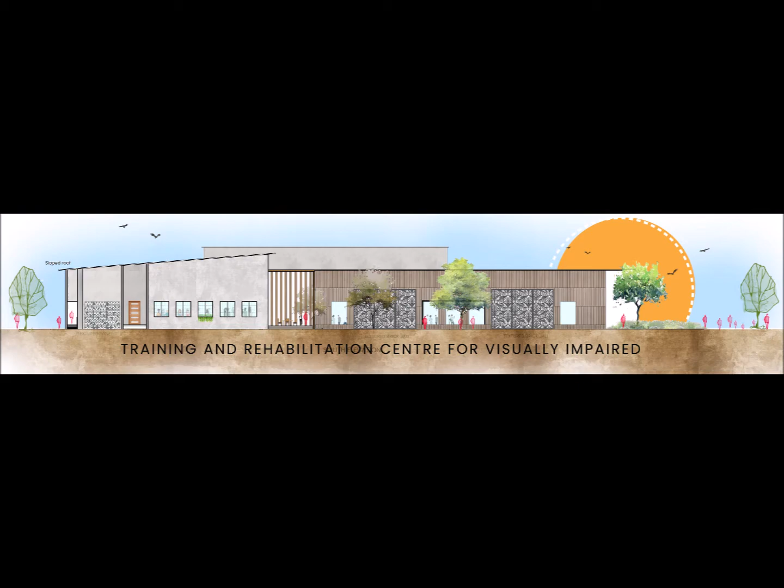I, Jasmin Anna Maxwell, will be presenting my B.Arch thesis, a training and rehabilitation center for the visually impaired. Visual impairment is defined as a loss or lack of ability to execute tasks requiring adequate visual acuity. Rehabilitation is defined as the process aimed at enabling persons with visual impairment to reach and maintain their optimal physical, sensory, intellectual, psychological, and functional social levels, so that they could change their lives to a higher degree of empowerment and independence.

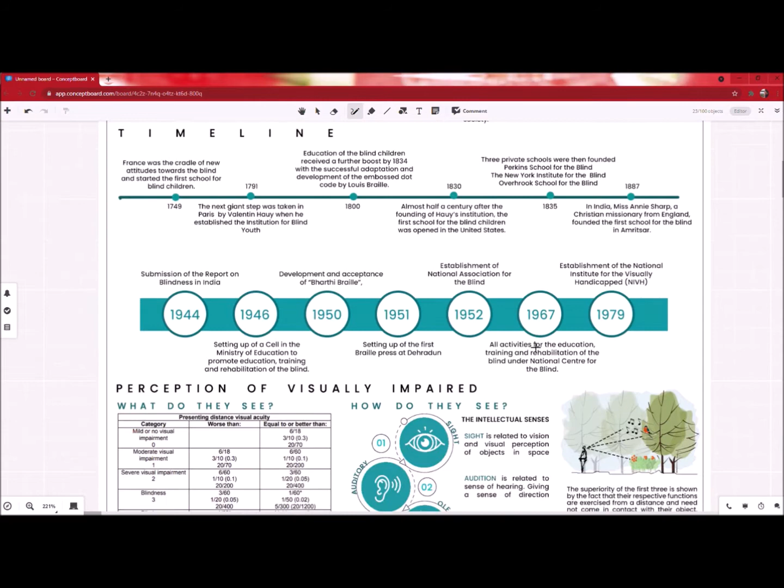Looking into the global scenario, there are over 2 billion people with visual impairments, 10 million of them in India. In the state of Kerala, there are 3,34,662 people with visual impairments, out of which 45% of them are not educated and around 13% in the ages of 10 to 30. In spite of this, there are less than 15 institutes established for the blind community all over India. There are schools that have taken up visually impaired students, but the courses are not catered to the needs of the blind user groups.

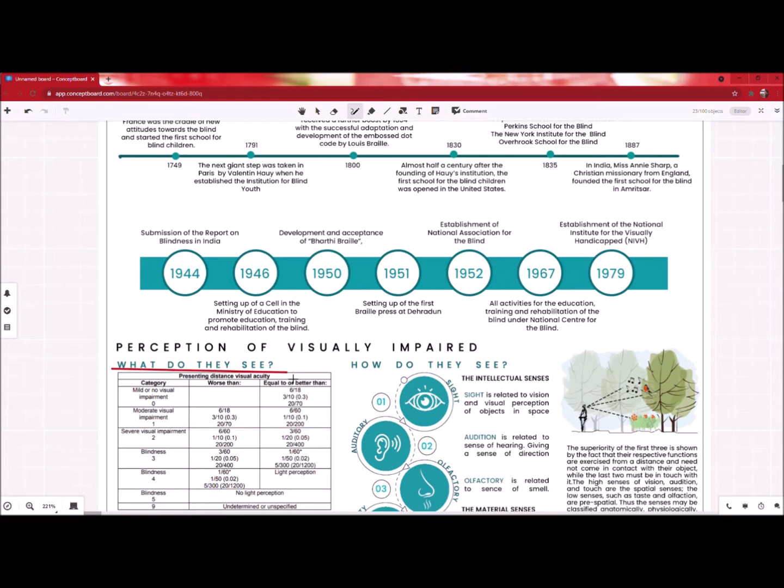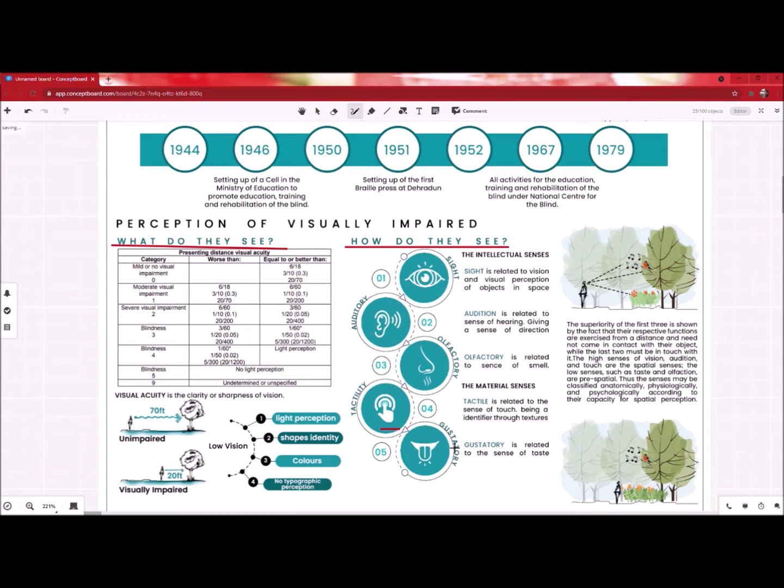To further understand the user groups, you have to know what and how they perceive these spaces. Therefore, various categories of visual impairment, low vision, and visual acuity were studied. The surroundings are experienced and perceived through sensory acquisition, mainly through the sense of touch or tactility, along with olfactory, auditory, and sometimes gustatory senses.

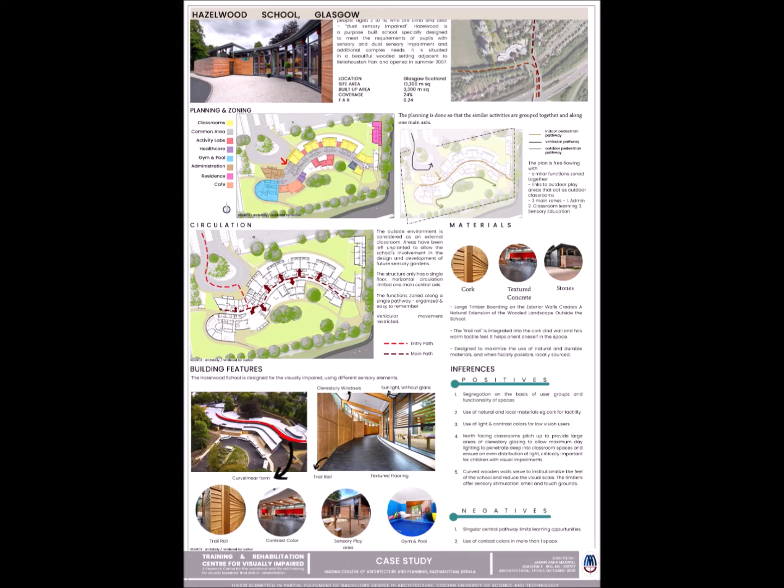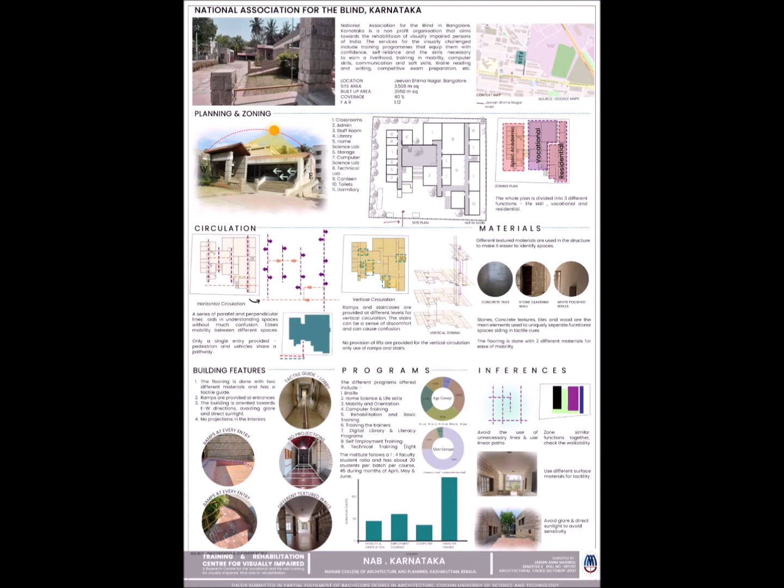To understand how these different sensory perceptions can be acquired through design, 6 case studies were conducted, 5 literature and 1 live. Them being: the Hazelwood School in Glasgow, Center for Visually Impaired and Blind in Mexico, Blind Relief Association, Delhi, National Association for the Blind in Delhi, National Association for the Blind in Karnataka, which was a live case study, and finally, Vocational Training Center in Calicut. After studying these, 7 parameters based on design strategies, user groups, and building elements are extracted.

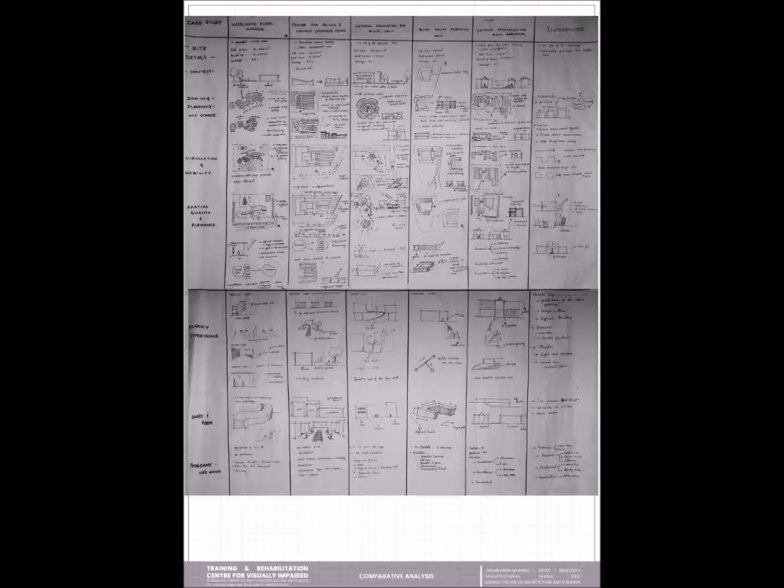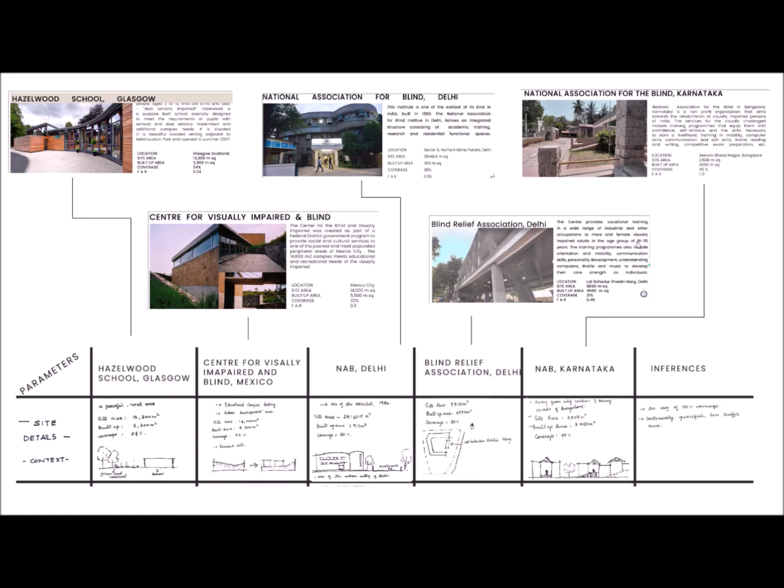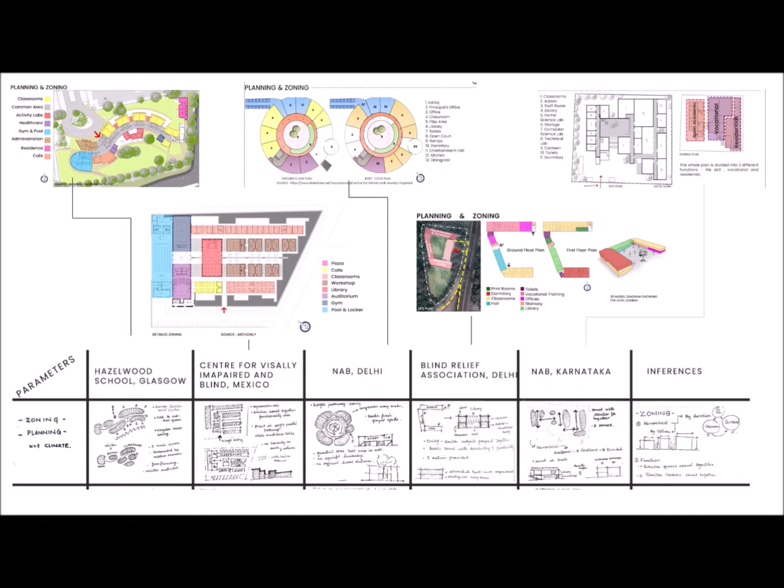First, the site details and context. All the case studies compared, the inferences and the standards lean towards 30% of built-up area in a more quiet, calm environment, which is easily accessible and has less traffic for the road training purposes. Next is the zoning and planning. The zoning strategy used in the Hazelwood School, Glasgow, and Center for the Blind, Mexico, proves to be the most accurate, where similar functions are zoned together. Volumetric hierarchy is given to different zones and activities. Similar courses are zoned together, thus forming different zones according to activities, both horizontally and in other buildings vertically.

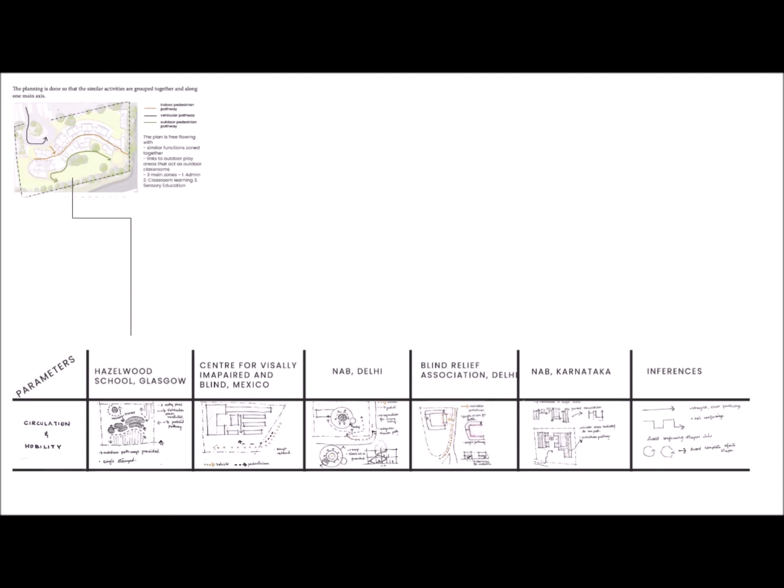The next is circulation and mobility. Circulation is one of the most important factors when it comes to design. The circulation should be linear, memorable with suitable cues. Symmetry and closed shapes such as circles seen in NAB Delhi should be avoided so as to not create confusions. Ramps are preferred over staircases, and single-story structures are preferred over multi-storied ones. There should be a clear limitation to vehicular access within the campus, and the campus design should be pedestrian-oriented.

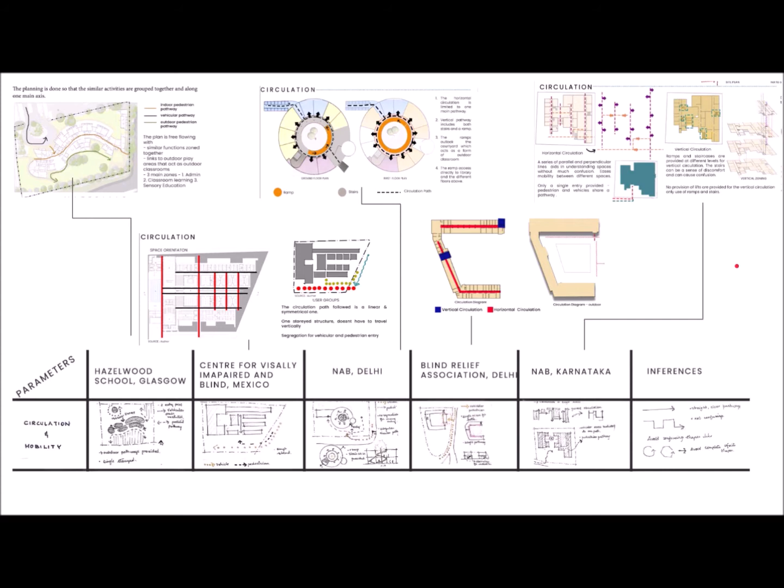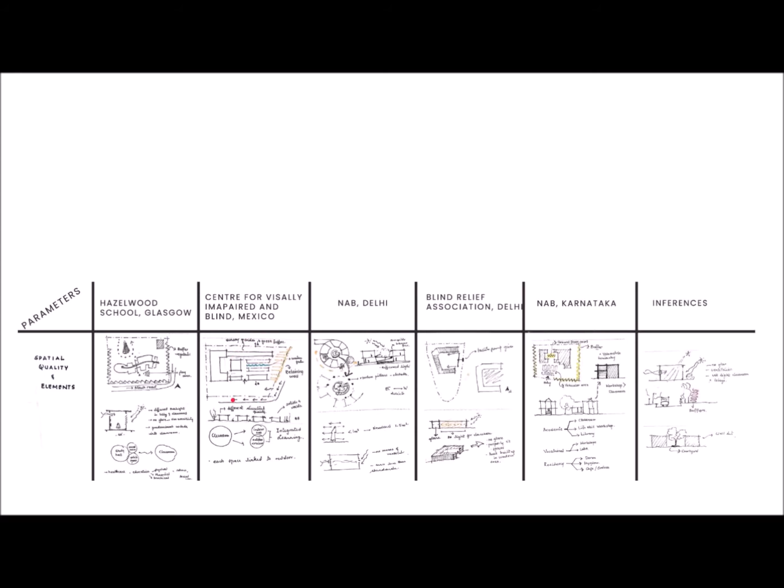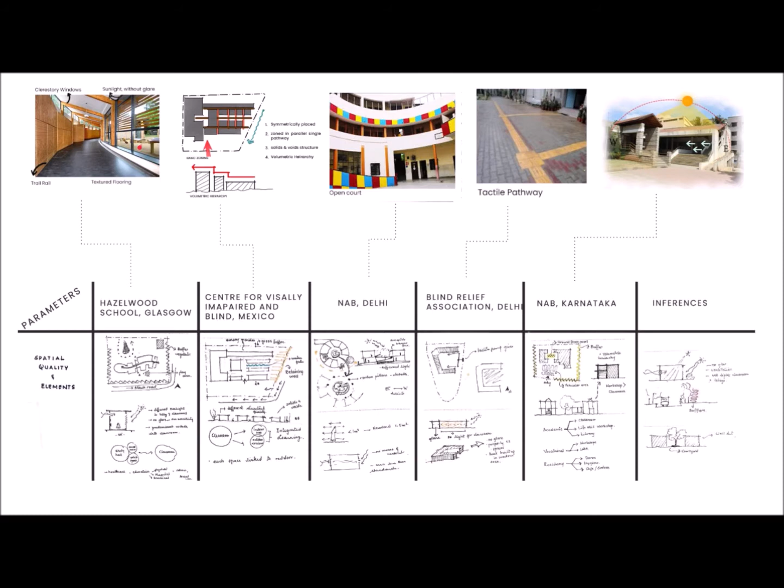Next is the spatial qualities and elements. As seen in the Hazelwood School and Center for the Blind Mexico, classrooms are well lit, fenestrations are positioned in a way so as to avoid glare, and clerestory windows and courtyards are used for ventilation and cooling purposes. Lobby and pathways are cleared from any projections and obstacles so as to create a hassle-free path. Indoor spaces are linked with significant outdoor spaces, and buffers are produced to reduce distractions.

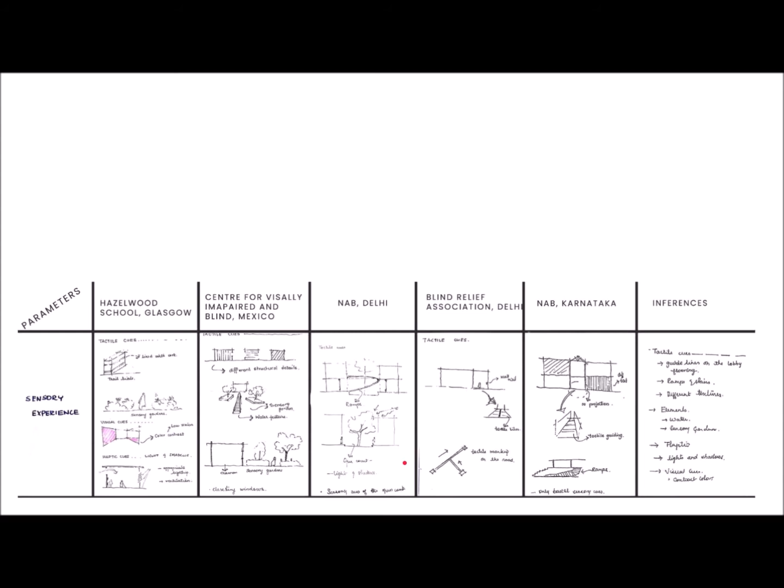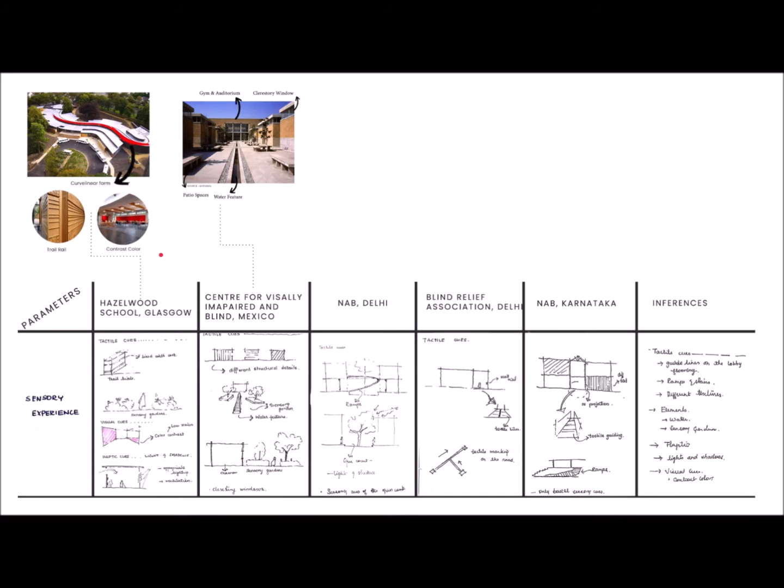Then we have sensory experience. Several techniques have been used all over the case studies, common ones being tactile cues, tiles and graphics in walls and flooring for guidance, color contrast and use of bright colors like yellow, courtyards for haptic senses such as wind pressure, sunlight, flora and fauna, sensory gardens. Center for the Visually Impaired uses the element of water in their plaza as guidance, that is the sound and the smell of water. The Hazelwood School has niches in the wall called trail rails for guidance. The shape and form: free-flowing forms with volumetric differences are the ones that are commonly seen throughout the case studies.

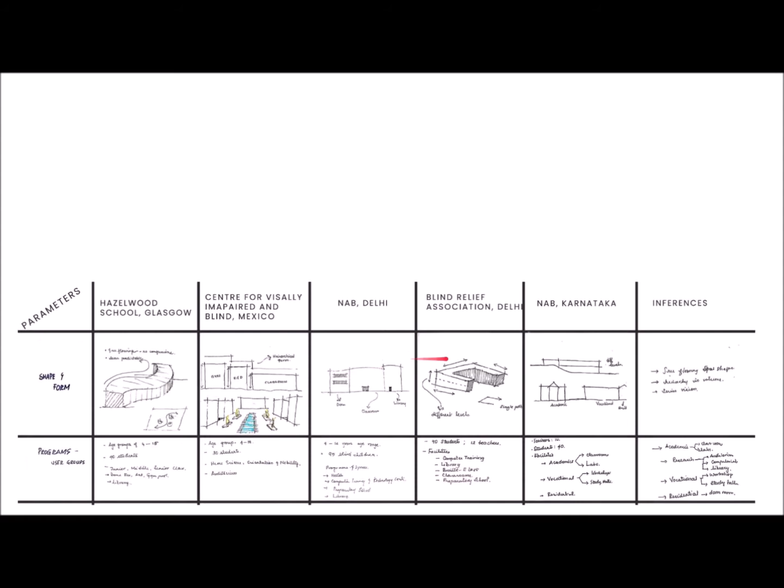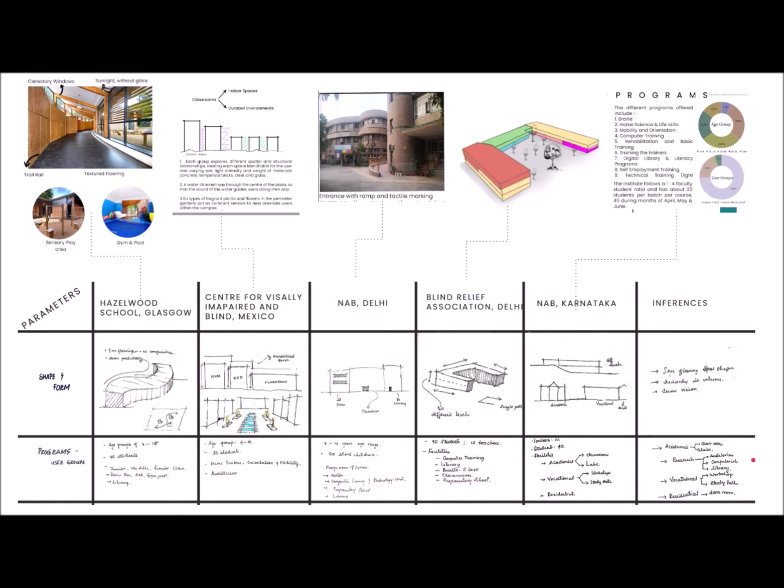Next is the program structure. Mainly 2 types of programs are common, that is the academic and vocational. The student-teacher ratio is 1:4. The academic training is for learning braille, mobility, and life skills. Vocational training is more career-oriented.

Consolidating the above study, a project brief is created. The aim of the project is to design a training, research, and rehabilitation center for the visually impaired. The different courses will include vocational training, multi-skill and life skill training, and academic training. The user groups include students aged 10 to 19, vocational training trainees aged 20 to 30, staff, trainees, trainers, and authority staff. A total of 300 students and 60 teaching staff would be the demographic.

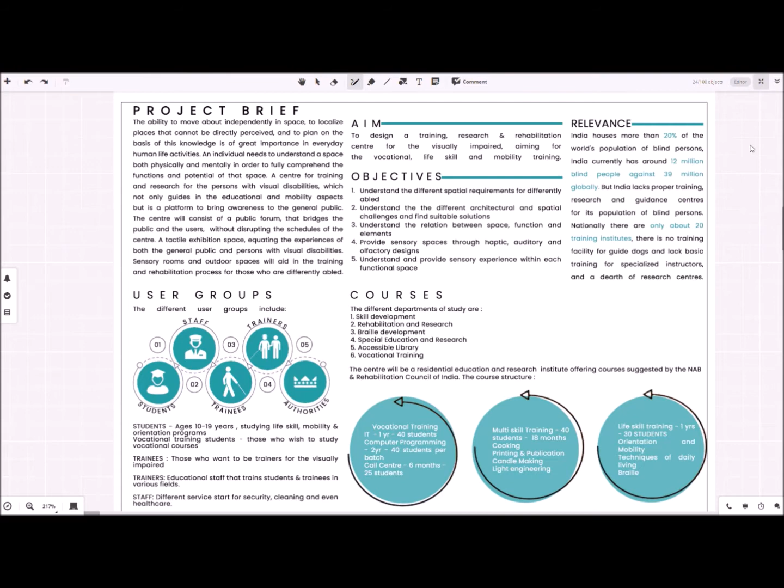Site analysis. The site is a government-owned site with an area of 19 acres located in the region of Chinnakada in the Kollam district. It is located near the Jolly Silks in Chinnakada and is an abandoned cotton mills factory site. The site has the view of Ashtamudi Lake on the north and the city centre from the south.

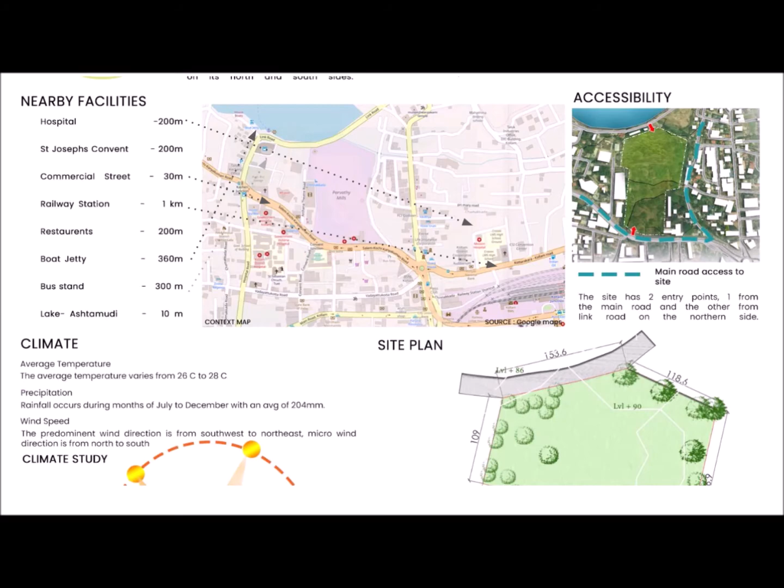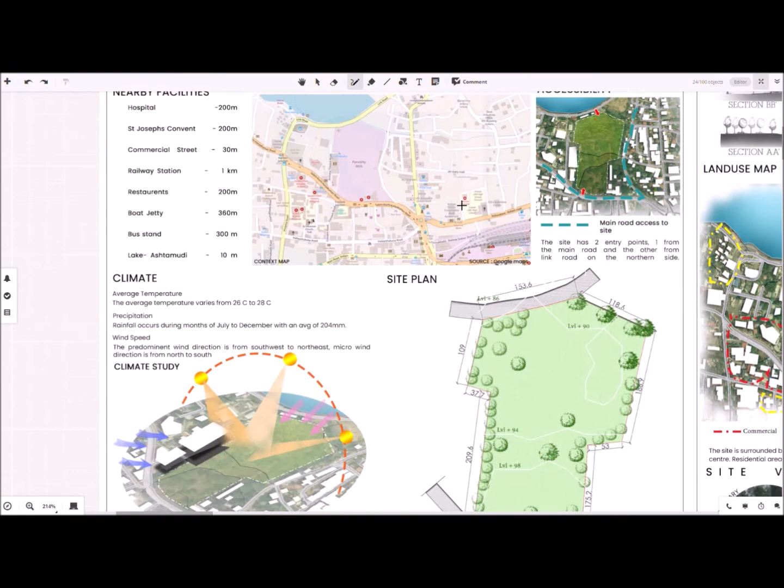Chinnakada, being the heart of Kollam city, is one of the most easily accessible areas. The site has the Kochi-Kanyakumari highway on the south and the link road adjacent in the north. Climate is an important factor when it comes to design, and hence the sun path is studied. The east-west orientation is best advised.

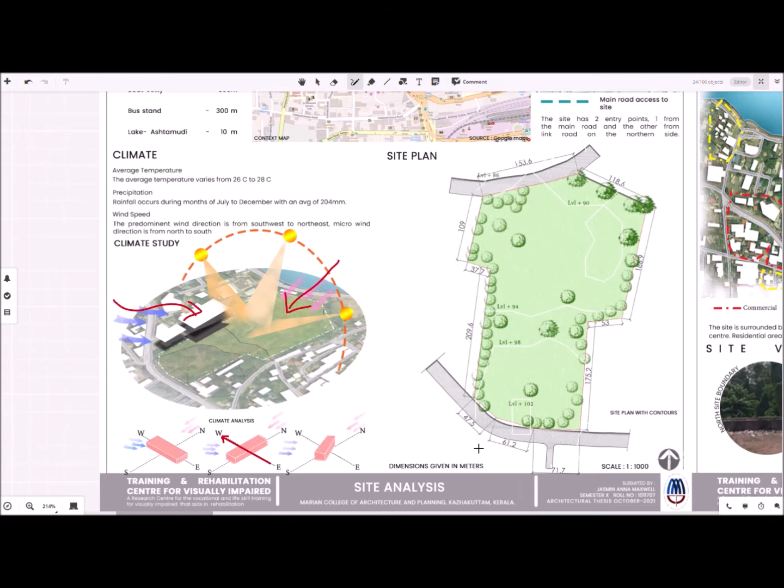Predominant winds are seen from the southwest to the northeast. When the microclimate is assessed, winds are also received from the lake side. It is a sloping site having a 12-meter level difference over a 300-meter stretch. Accessibility to the site from the non-traffic road, that is the link road, makes this suitable for road training.

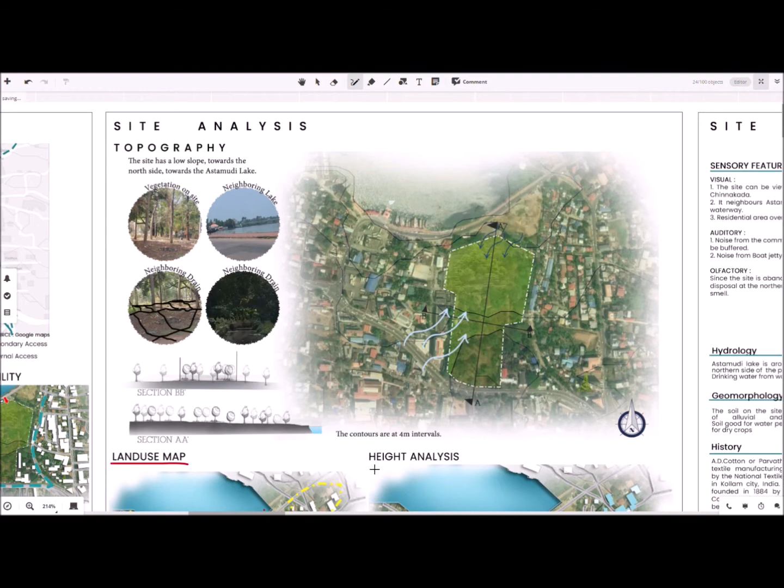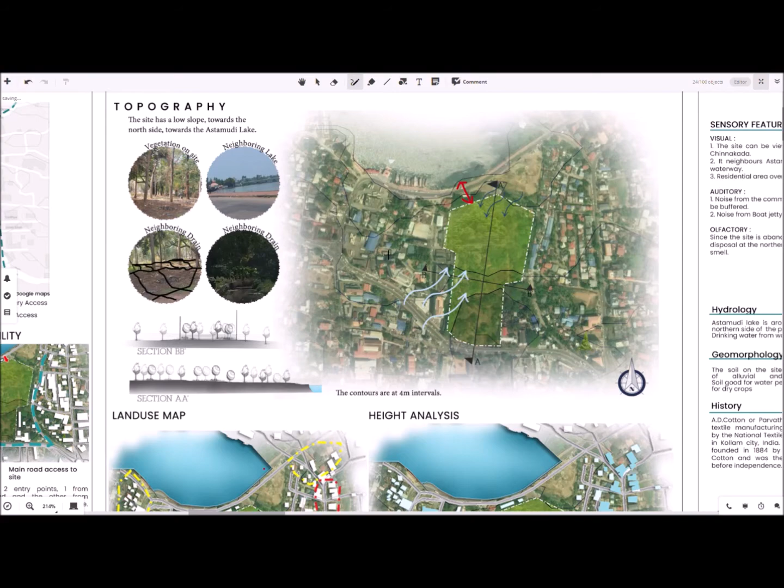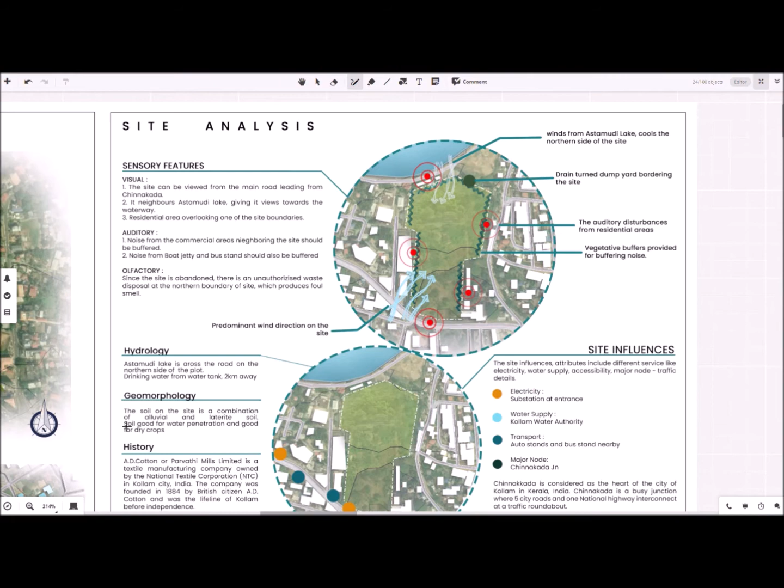Different factors like topography and context features such as land use map and height analysis were also conducted and studied. A 50-meter setback is required from the Ashtamudi Lake for building construction purposes. When the sensory features on the site are studied, it is shown that an auditory buffer is required when designing in the site. Different services like hydrology, geomorphology, and site influences were also studied so as to produce an efficient design.

SWOT analysis. The strength: the site being less than 1 kilometer away from the Kollam city centre can be a great catalyst for area development. The location proves best to train visually impaired persons to be independent. The weakness: the site is near the water body and, being abandoned, has accumulated waste. The auditory features from the neighbouring sites are to be solved in the site design.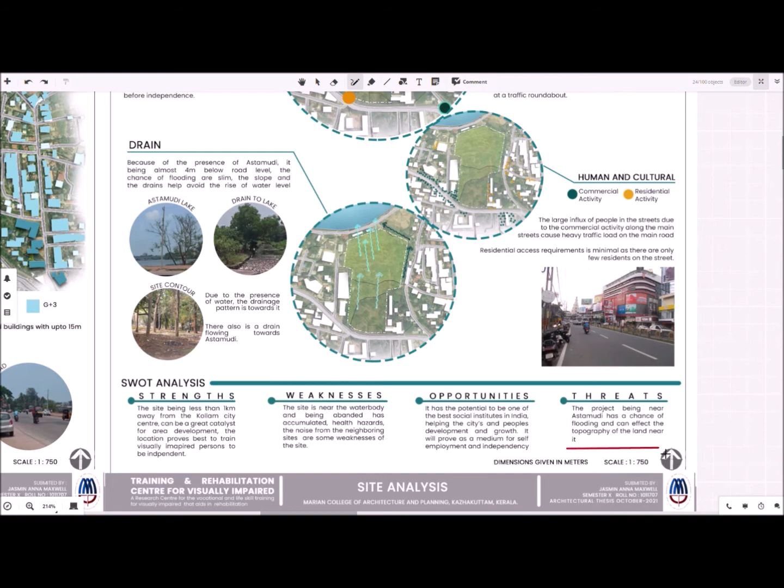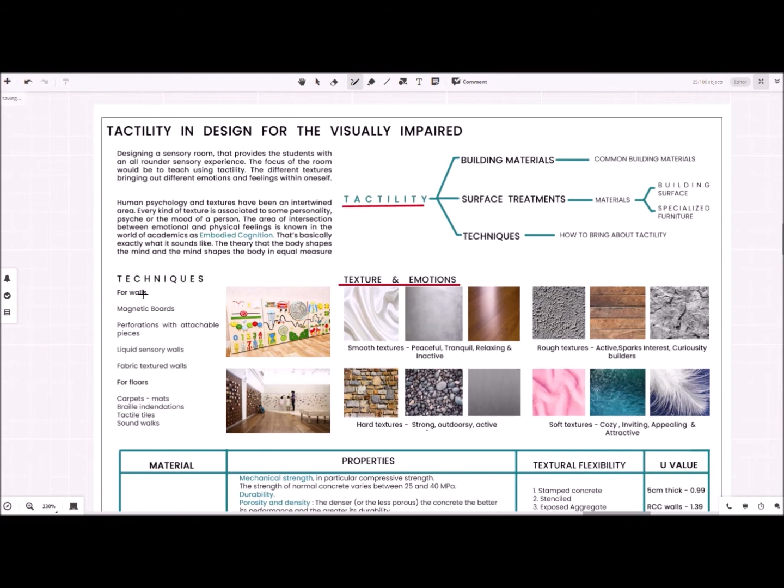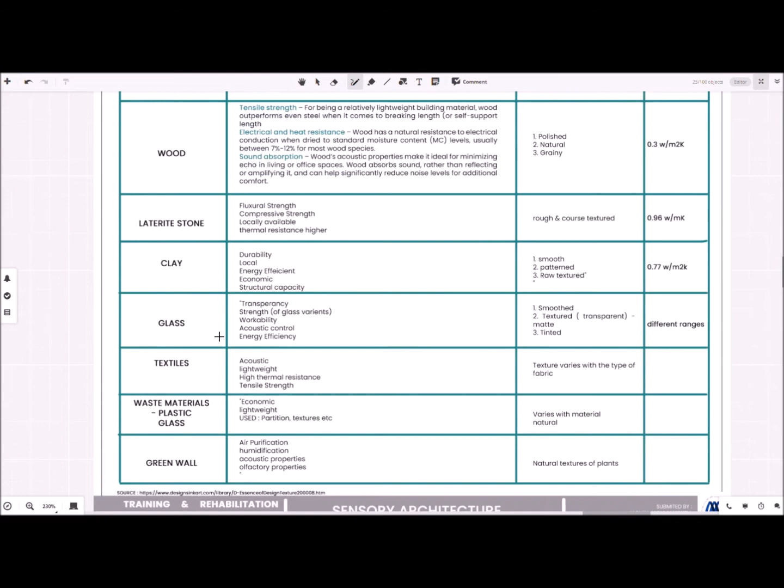Opportunities: it has the potential to be one of the best social institutes in India, helping the city and people's development and growth. It will prove as a medium for self-employment and independency. Keeping the user groups in mind, tactility is one of the key features for the project and hence my special topic. Tactility isn't just limited to a surface. It evokes emotions through tangible and intangible sources. Different techniques for acquiring this have been studied. Materials and thermal properties have been listed to further provide tactile and thermal comfort to the user groups.

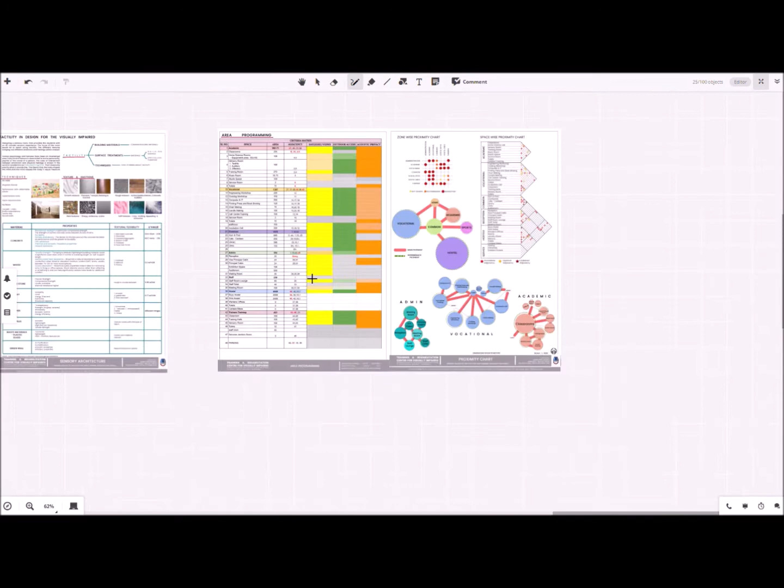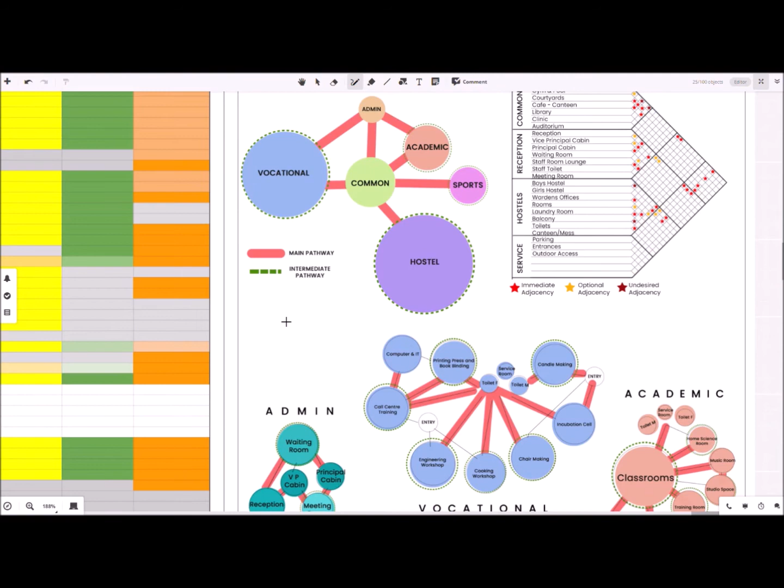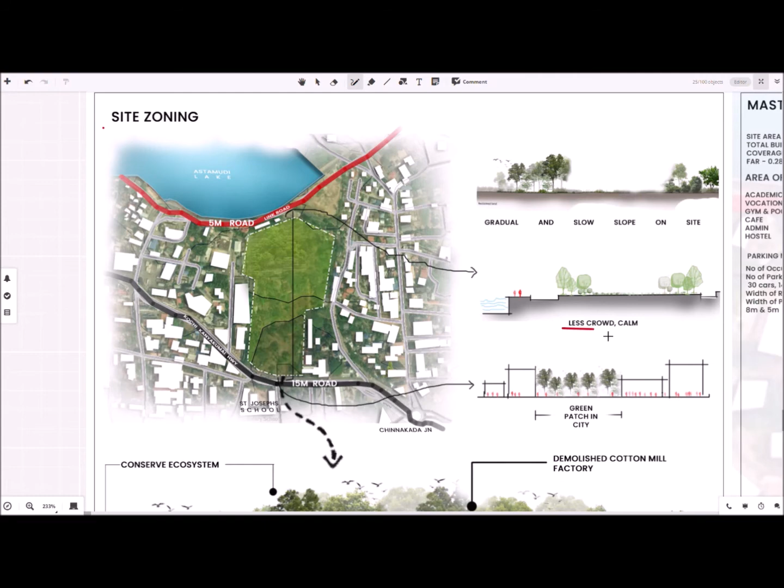The design process started with area programming, where the different requirements and their areas were understood and studied. Based on that, proximity charts were prepared for different zones and for different spaces within each zone. It is thus concluded in a zonal bubble diagram showing the proximity and a brief zoning of all the spaces. Site zoning. As mentioned, there are two access points, of which the link road is considered the main access due to its easy accessibility, calm and trafficless atmosphere, making it suitable for road training as well.

The site used to be an abandoned cotton mill factory, thus creating a unique ecosystem of flora and fauna. To conserve that, the built environment will be restricted to the already used land. The vehicular axis is restricted to the shortest distance between the two access points. Climatic features are looked into, creating wind tunneling effects to all spaces. The elements are zoned in a 30-meter distance interval as per CPWD walkability norms.

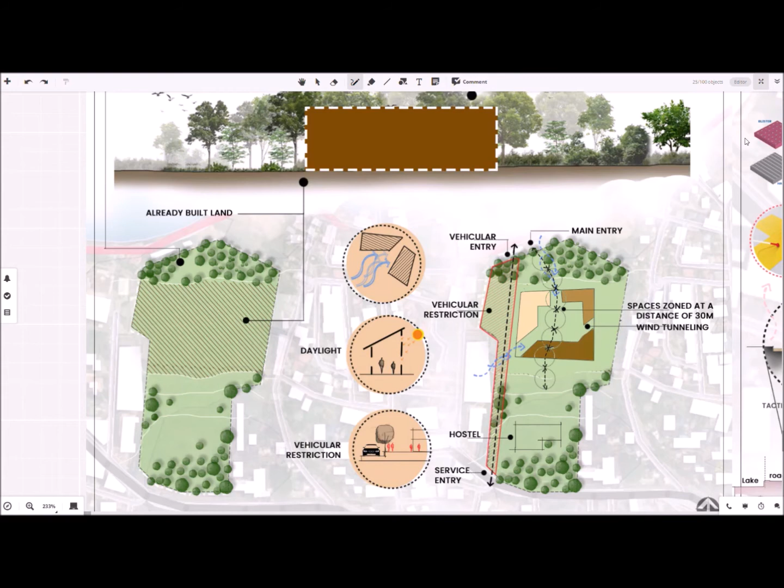Coming to the master plan. The total built-up area is 21,701 square meters with a ground coverage of 20% and an FAR of 0.28. The vehicular axis is a two-way road that leads to the main drop-off point, parking spaces, and different service points throughout the site. The pedestrian pathway is planned to enhance the sensory experience of its user groups.

Entering into the site, there is a welcoming water feature pergola that has a tactile map on one side and the trickling water effect on the other to enhance the auditory and haptic senses. Moving through the walkway along it, tactile guides are provided as per standards and the trickling of the water becomes a stream. The sound from the flora, the fauna, the birds chirping and the rustling of the trees in the conserved zone enhances this experience. At 30 meters is the first rest space, a pergola structure that predominantly plays with light and shadow, extending into the conserved zones.

Then we move on to the equidistant core and built spaces, first being the admin block and the auditorium space that limits the public. In the core space, the stream of water turns into an interactive fountain feature, playing with the different sound intensity of water. Its auditory feature becomes a guide in orientation for the users. Every element given in the core space is based on functionality and in coherence to the indoor spaces. The baseball ground is zoned near the gym and pool, forming the recreational zone. Similarly, the outdoor classroom spaces are provided with the academic block, seating spaces with the cafe and admin block, and outdoor workshops with the vocational training block.

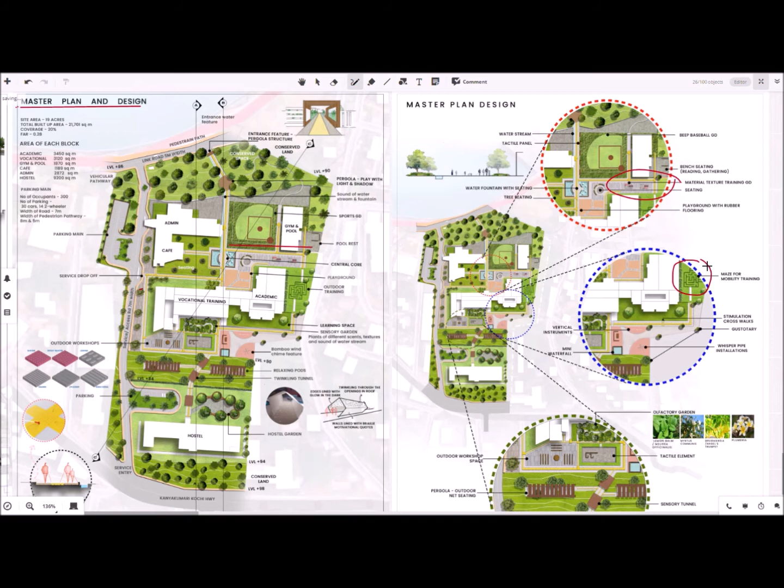Throughout the site, there are stimulation crosswalks to help navigation training. The sensory gardens are also lined with different fruit trees for gustatory enhancement. A hill reflecting the site level difference is maintained to reach the living spaces and hostels. Through that hill, the tunnel is the next sensory experience.

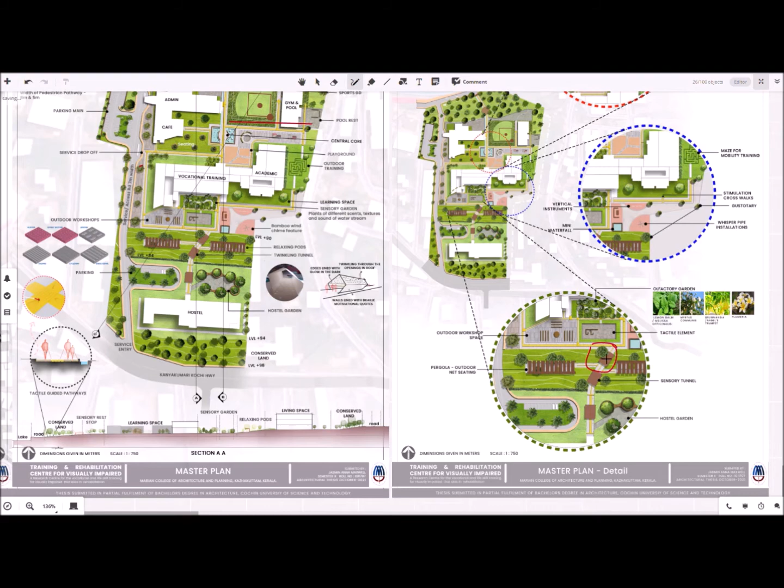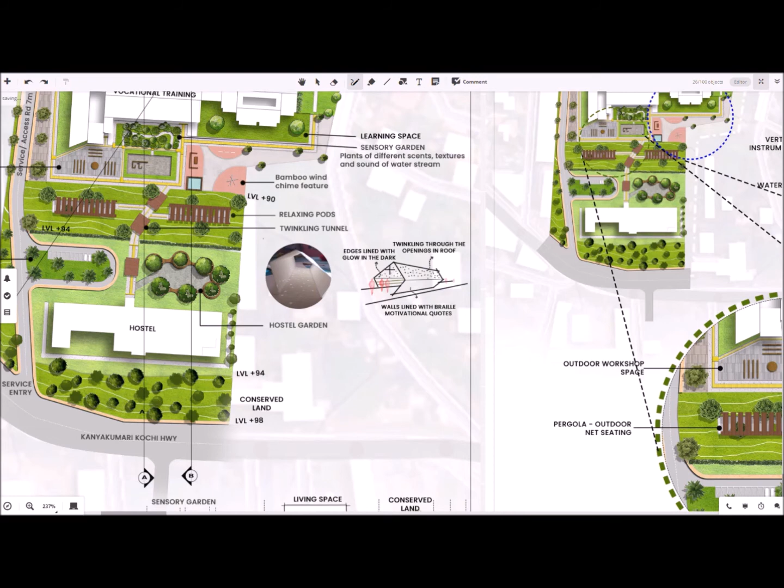It's a dynamic structure that will evolve from day to night, playing with light reflections, consisting of braille motivational quotes on its walls. The whole site is zoned with the concept of solids and voids. That is, every indoor space has a consequent outdoor space, which will help in learning, training, and achieving their goal.

Moving on to individual plans, several techniques have been used in the plans to help guide the user groups. Mainly trail rails, which are walls with niches having braille writing, tactile pathways, and infographic tiles. Similar functions having similar flooring materials, linear circulation with no obstacles, and so on.

First, we have the admin block, with main access leading to the administrative and public spaces, auditorium and clinic. Cafe space can be accessed from the admin as well as from the main block. Deck spaces connect to the outdoors leading to the core zone. Different types of flooring materials and tactile tiles are also used for guidance.

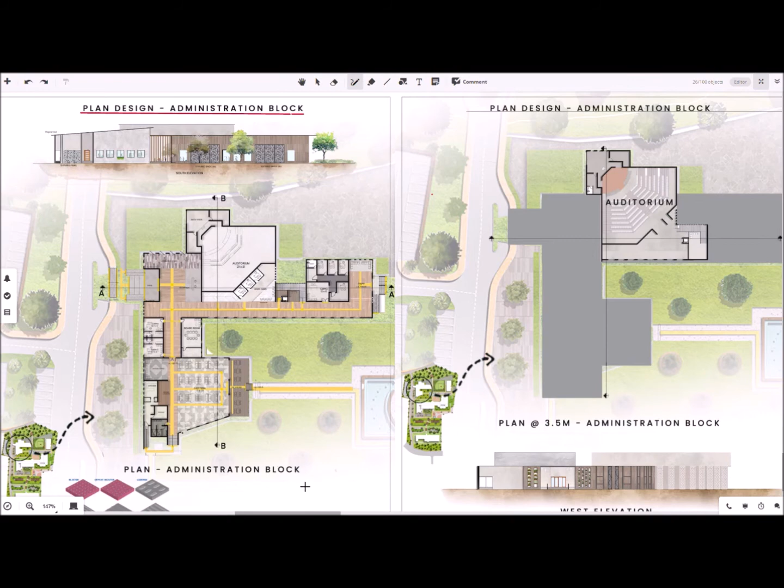A 300 occupancy auditorium is also provided in the zone. There are 3 different access points to this block. A service drop-off point is adjacent to the kitchen and cafe space.

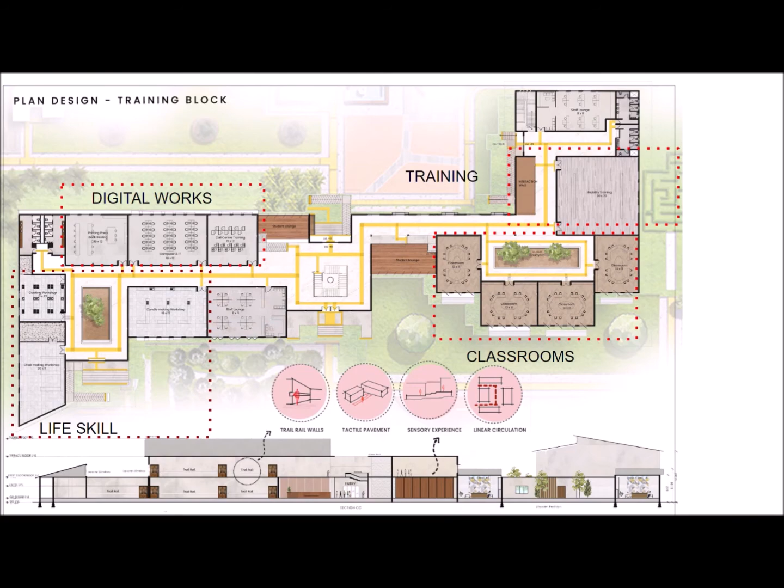Next, we have the vocational training and academic block, which is designed with trail rails with braille inside. A 1.2 meter wide tactile guide is provided all throughout the lobby spaces. The zoning strategy used involves similar functions being zoned together. In each space, the accessibility and functionality is looked into. For example, the student lounge is designed at a different level than the corridor spaces.

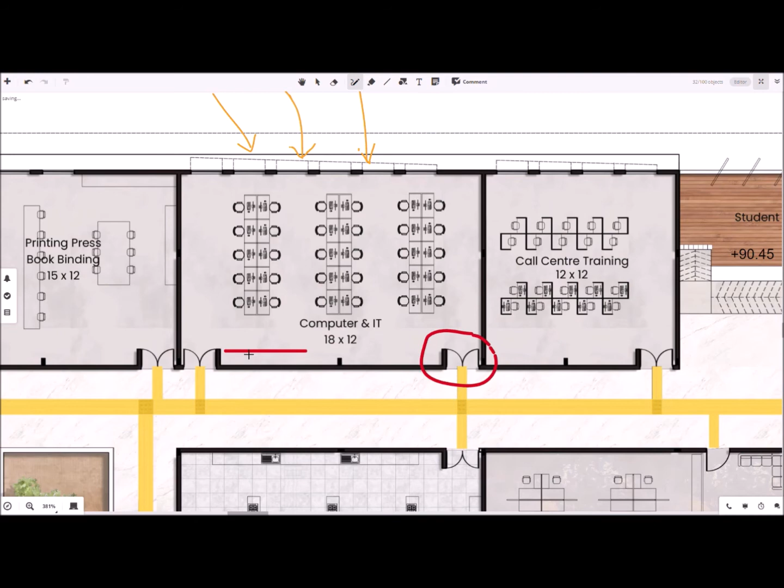Interior layouts are designed with 2-meter circulation spaces in between. All doors are designed with small wall lobbies, which give a storage niche for their white canes and other equipment, and also give a specific area for entry and exits.

In the academic section, the classrooms are aligned in such a way so as to avoid glare but be ventilated. Stairs from the classrooms lead to outdoor learning spaces. Interior layouts show a more social and group type of learning.

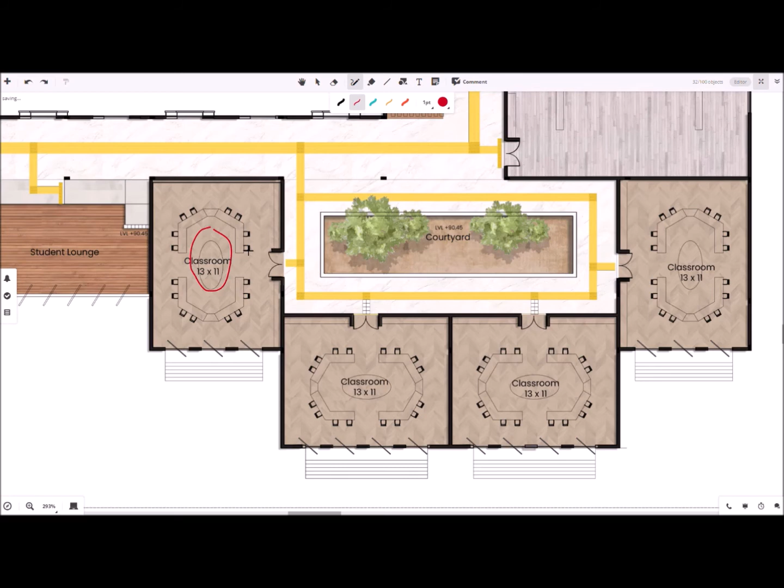The first floor consists of the library, studios, and trainers' training classrooms. The library space is designed to act as not just a secondary information source, but an interactive gathering and sharing space for all user groups, where humans are the resources. Hence, it is designed in different parts.

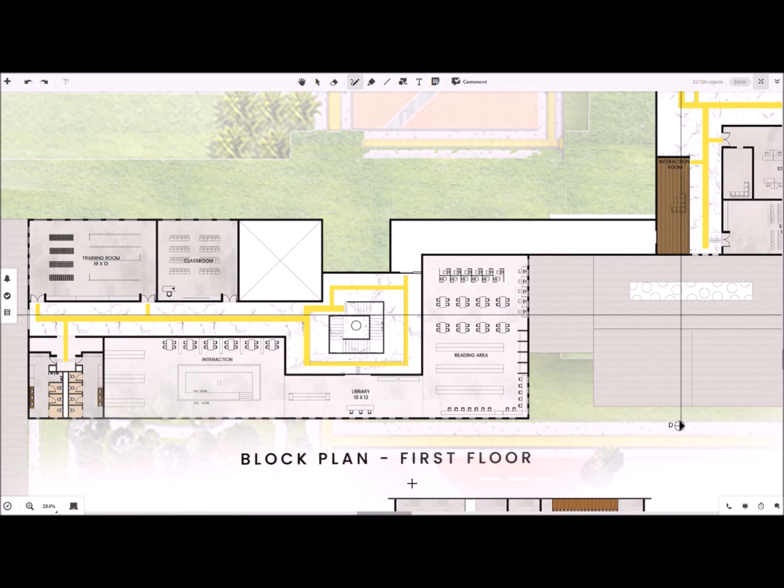The first part being the reception and entrance foyer, the second being Braille audiobooks and quick reference, where one can issue books and read them as well. And the third section is where interaction and sharing of experiences take place.

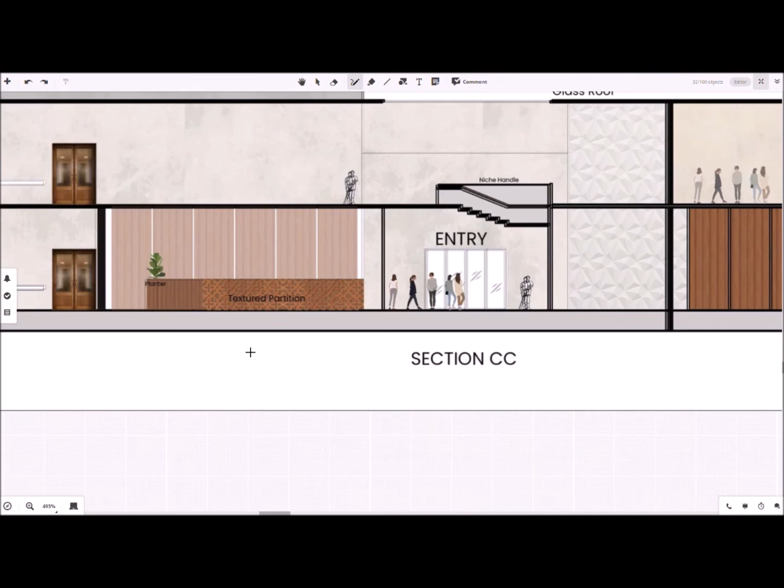To ensure no glare and thermally comfortable indoor spaces, different shading devices are used. Clerestory windows and lower windows are given for proper ventilation. The facades are lined with jaali works, textured concrete and brick design for a tactile experience and perception.

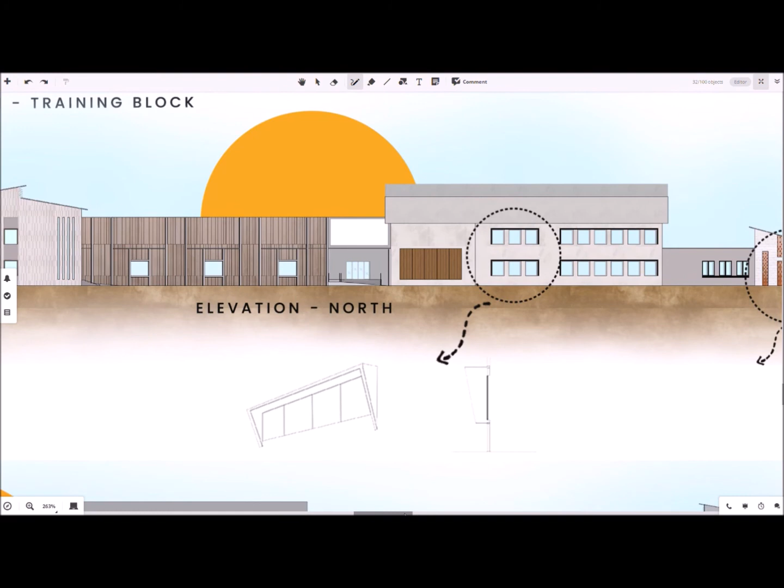Then we have the recreation block that is adjacent to our beep baseball ground. It is divided into two parts. One being indoor games such as rock climbing, board games, entertainment units, and the other part being swimming pools. The swimming pool is designed in two ways, the training pool and the adult pool. The training pool is only 1 meter deep, and the adult pool is 3 meters deep.

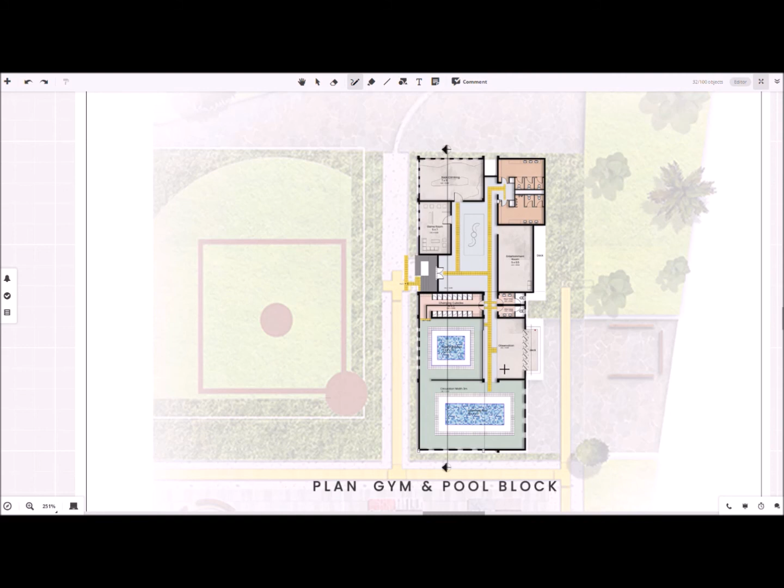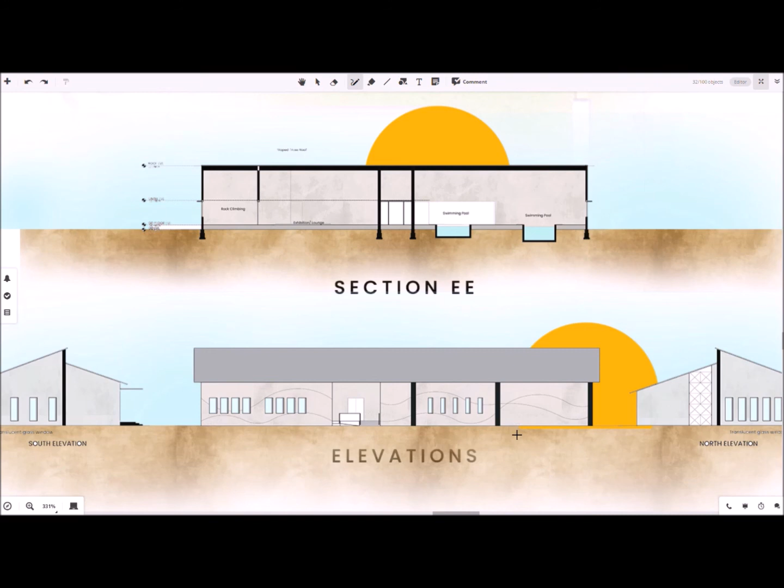An offset of 3 meters is given for each pool, and 1 meter immediate warning offsets are also given. Observation zones are provided for coaches. It is also used for auditory learning and entertainment. These have decks that give access to the outdoor landscape zone. The building facade is provided with a wave-like pattern corresponding to its interior functions.

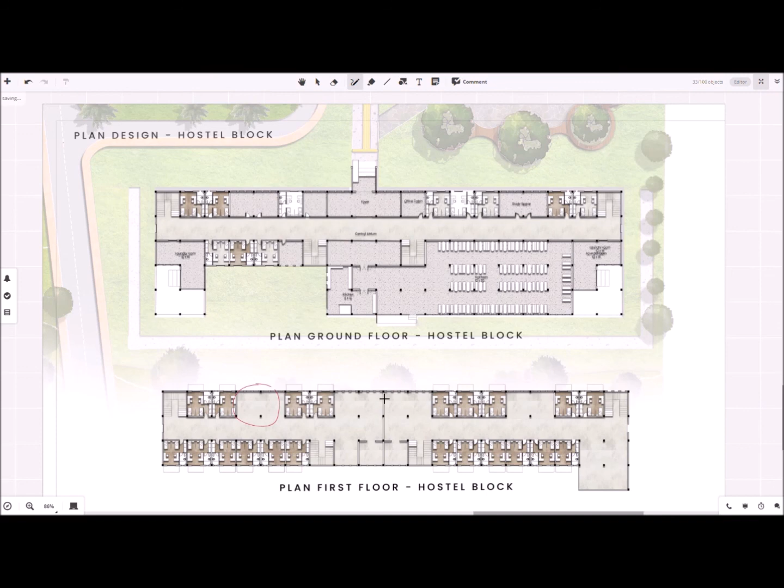Finally, we have the hostel block or the living spaces. It is a G+5 combined hostel with the girls on the west wing and the boys on the east wing. An interactive dining space links both on the ground floor. On the upper floors, it is separated by study halls. Open study spaces and labs are provided on every floor. The rooms are designed for two, with an attached washroom and organized interior spaces leading to a balcony.

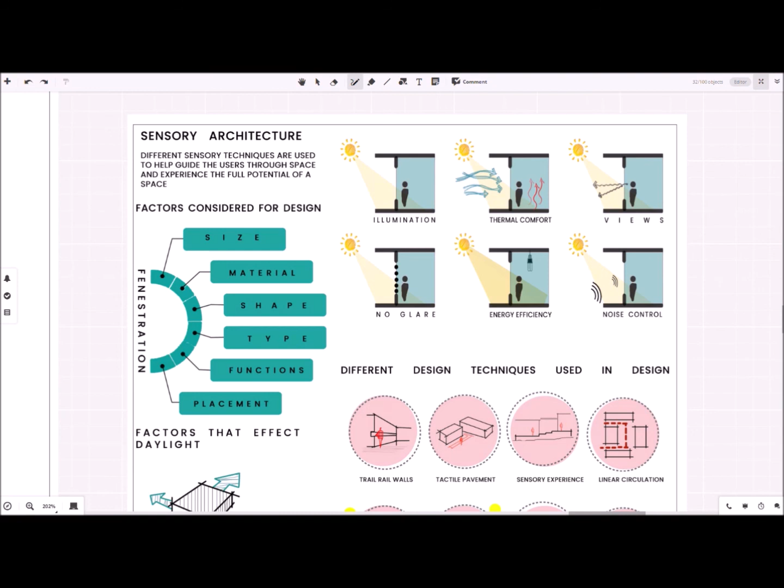My special topic is sensory architecture focusing on tangible and intangible tactility, that is, different texture materials are used in different spaces to evoke a sense of understanding and calmness. In classrooms, wooden flooring and smoother texture is used, while in corridors, a more gripped texture is used, with the use of tactile paving. Intangible sources such as heat and light are also used to further experience the space and understand it to its full potential.

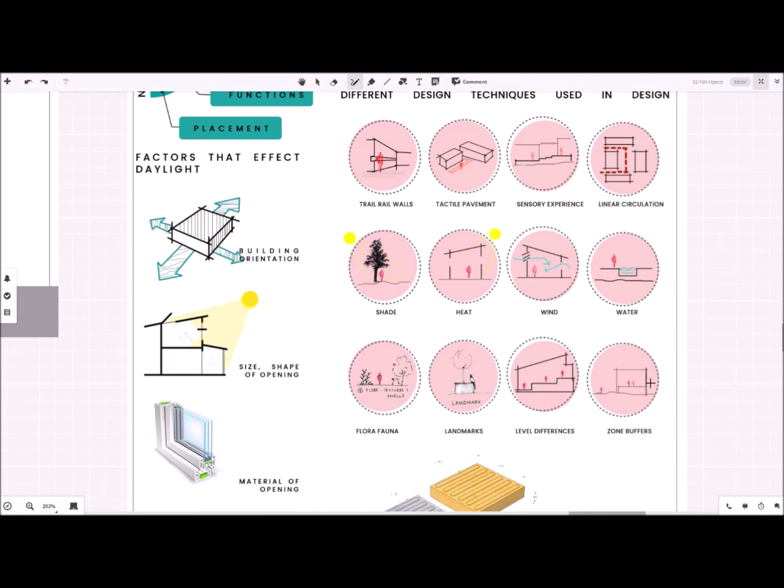The orientation and type of fenestrations, the use of water in creating a soundscape, and the use of solids and voids to create volumetric differences are some of the key features used throughout the design of this building.

Through this thesis, I hope to inspire and shed light on the elements that are beyond the eyes, so that everybody can experience spaces through their full sensory potential.